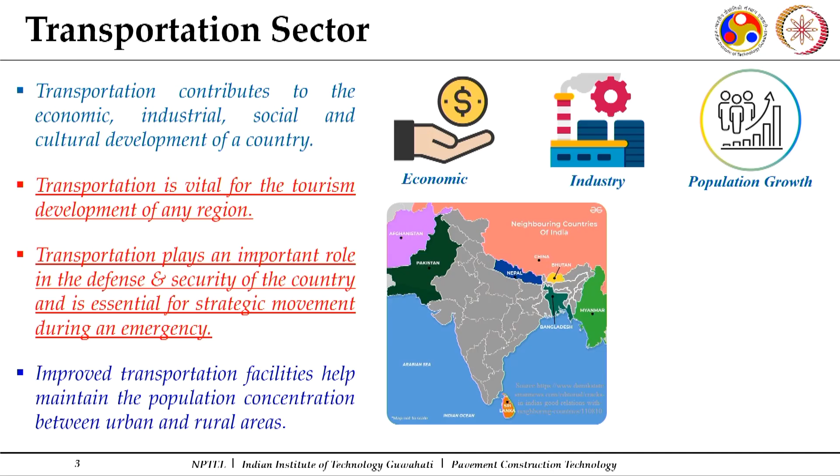You might have seen various cities in India and abroad which have picked up as industrial centers, as well as centers for social and cultural development, because of good transportation facilities available in those regions or cities. In addition, it plays a very important role in the tourism of a country, as in our country we have certain regions like this.

Leh is a place located in Jammu and Kashmir. It is a tourist center and a place of attraction, as it offers good transportation facilities, with good connectivity by road and by air. So transportation plays an important role in the development of tourism of any country.

It plays an important role in the defense and security of a country, and is essential for strategic movement during an emergency. India shares international borders with many other countries, so from a strategic point of view, the development of transportation facilities along the international borders also forms an important part of the country's development.

Improved transportation facilities help us maintain the population concentration between urban and rural areas. This is again a matter of concern. You can see for any state or city what the population density is - for example, in Mumbai compared to the whole population density of Maharashtra state, or the population density of Patna compared to the population density of the entire Bihar state.

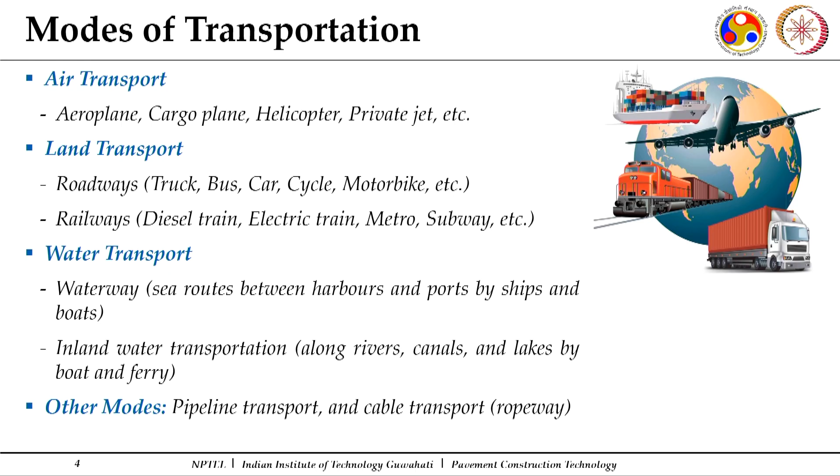Certain countries like Germany, Belgium and Netherlands have very good inland water transportation. In India also, we are developing inland water transportation facilities along certain sections. This is comparatively a slower mode of transportation, but the cost is quite less compared to air transportation. Some other modes may be pipeline transport or cable transport, like ropeways. So these are the major modes of transportation.

Now let us look at the development of roads. Even if we go back to the Roman period, the earliest large scale highway road construction is attributed to the Romans, who constructed an extensive system of roads radiating in many directions from Rome around 312 BC.

At the peak of the Roman Empire, there were more than 4 lakh kilometers of roads, out of which 80,000 were stone paved. This shows that even in that old period, there was significant importance given to road transport.

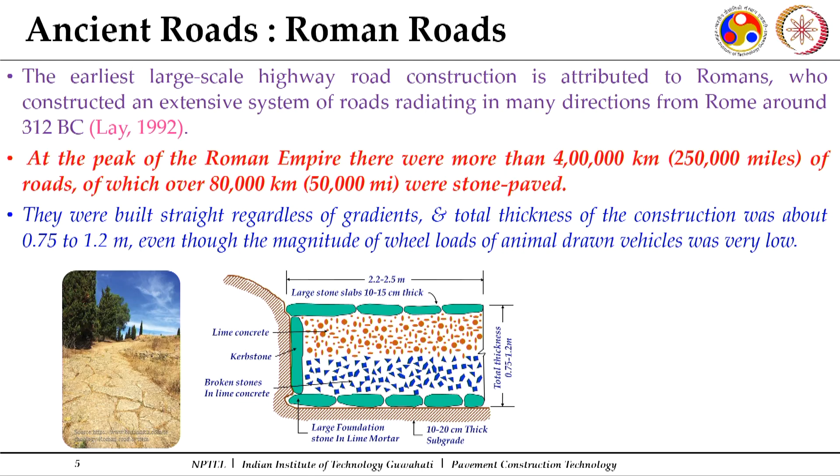Even in the Indian subcontinent, we have a very old history with the development of roads. Indian civilization, one of the oldest in the world, had evidence of road construction dating back to around 2800 BC. Excavations from the Mohenjo-daro civilization are shown on the right hand side. Excavation of Mohenjo-daro and Harappa revealed the existence of roads during the period of 2500 to 3500 BC, showing how roads were present at that moment in time.

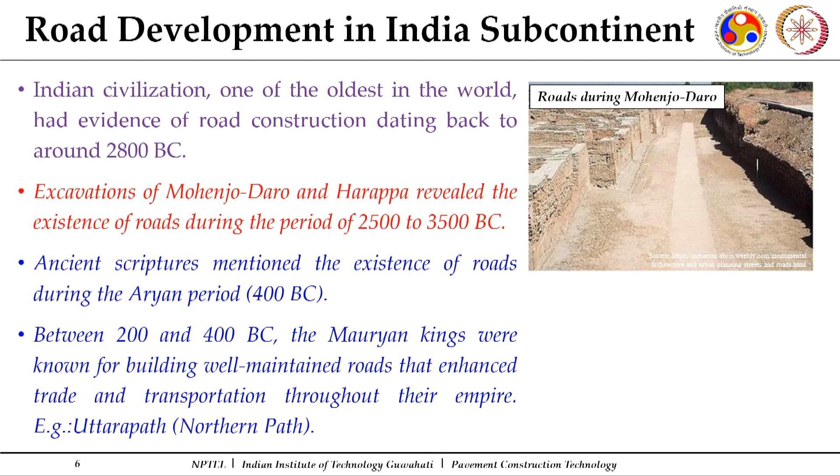Ancient scriptures mention the existence of roads during the Aryan period also, around 400 BC. Between 200 and 400 BC, the Mauryan kings were known for building well-maintained roads that enhanced trade and transportation through their empire. So even those old civilizations knew the importance of good road networks for growing their trade.

Over the centuries, the road has acted as one of the major trade routes in the region, facilitating both travel and postal communication. These road sectors, still existing, played a very important role in earlier periods, and currently also we realize their importance. In coming slides I'll explain and highlight the importance of road transportation.

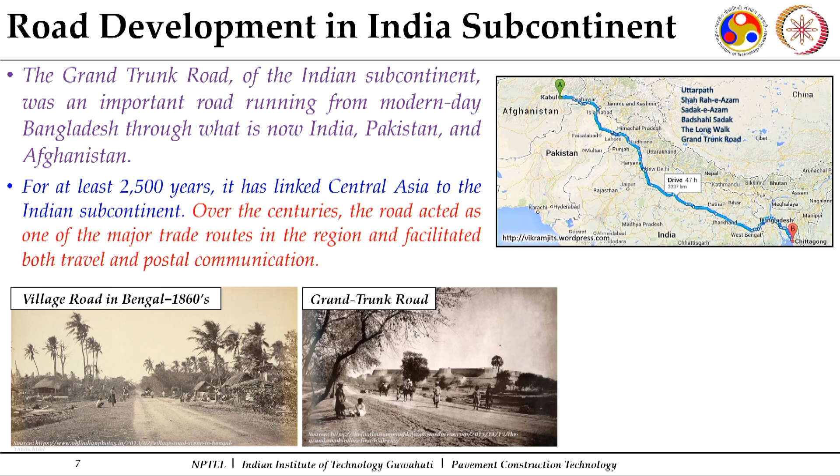Now, what were the traditional methods used for road construction? Just to give an idea of how roads were constructed, what combinations were considered, and how surfaces were built for the movement of people and animal drawn vehicles. One of the popular traditional methods is the Trésaguet method. Pierre Marie Jérôme Trésaguet was the Inspector General of Roads in France.

He suggested the thickness of construction to be around 30 centimeters with proper side drainage. Again, this picture has been drawn to explain some features, not exactly to scale. You can see large foundation stones placed at the top of the subgrade soil, then broken stone pieces over that, and finally smaller pieces on top, with a camber of around 1 in 45.

So this camber is around 2.2 to 2.5 percent. Normally nowadays also we construct roads with a camber of around 2%. The top layer, the wearing course, was constructed using small sized broken stones or hard angular gravel. They did not incorporate any binding material.

Nowadays the surfaces we construct, called paved roads, make use of binding materials. The common binding materials are cement, bitumen, and fly ash. But at that time, they were not using any binding material such as bitumen or cement. Instead, they relied solely on mechanical interlock between the aggregate pieces and compaction through traffic to achieve stability. Provision of camber was there.

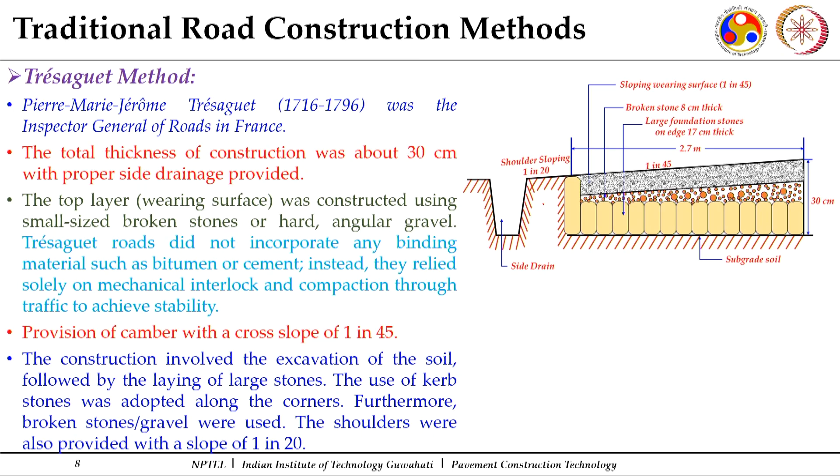This was felt necessary so as to remove surface water. The construction involved excavation of the soil, followed by laying of large stone pieces. The use of curb stones was also found reported in some studies. Furthermore, broken stones and gravels were used. The shoulders were constructed at a steeper slope compared to the main surface.

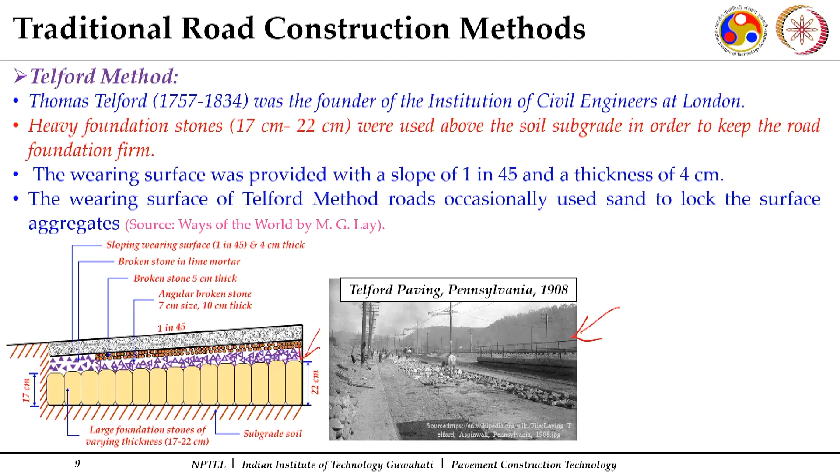This shows how, from very old periods, things were getting developed, how the technology was improving, and how the understanding of road construction methodology was developing. So these are some of the traditional road construction methods.

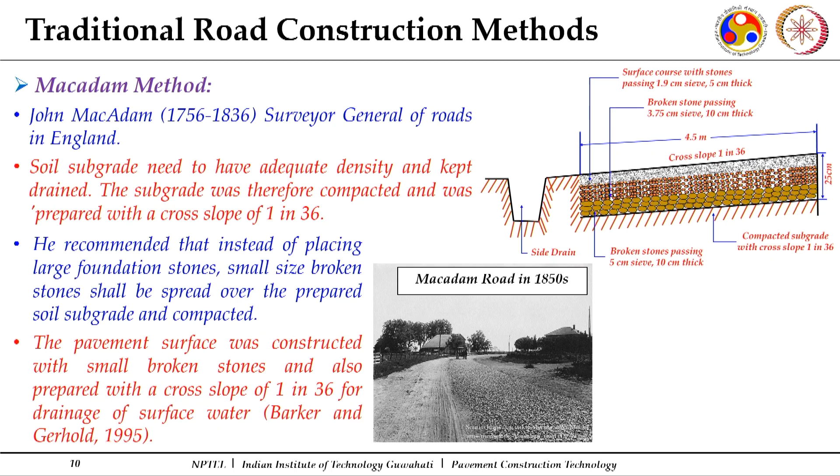As we can see, from very old civilization to what we have currently, everybody has felt the importance of road transportation. Why is there so much demand for road transportation? We have seen that it contributes to every sector - social development, industrial development, tourist development. It is also important from a strategic point of view. From a user perspective, everybody, for any mode of transport, requires comfortable and safe movement from one place to another. Whatever mode of transportation we use, our main requirement is that the movement should be comfortable and safe. These are the two main requirements from any user's perspective.

Among surface transport, especially roads and railways, I will be focusing more on road transport in this course. Surface transportation is the most widely used mode of transportation, not only in India but throughout the globe. A country's development is often measured in terms of its total paved road mileage. Fortunately, India has the second largest road network. So a country's progress or development is measured in terms of how much length of road it has. This surface or road transportation is important because of easy accessibility, flexibility of operations, door to door service, and reliability, which have earned road transport an increasingly higher share of both passenger and freight traffic. This is the beauty and advantage of road transportation.

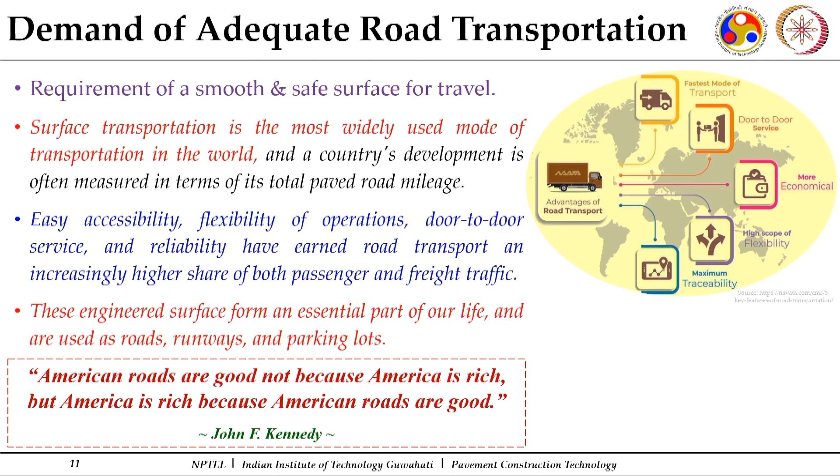There is a very common quote by US President John F. Kennedy, who said, American roads are good not because America is rich, but America is rich because American roads are good.

Now let us come to the current state of Indian road infrastructure. Most of this information has been derived from the Ministry of Road Transport and Highways and the Indian Brand Equity Foundation. If we look at the Indian road infrastructure, we have a total length of around 66.71 lakh kilometers, which is a figure from 2024.

Under this particular classification, you can see NH represents national highways, SH represents state highways, and all other categories are kept under the category of other roads. India has about 66.71 lakh kilometers of road network, which is the second largest in the world. This comprises national highways, expressways, state highways, major district roads, other district roads, village roads, and urban roads. I will discuss these different categories of roads when I discuss the classification of roads.

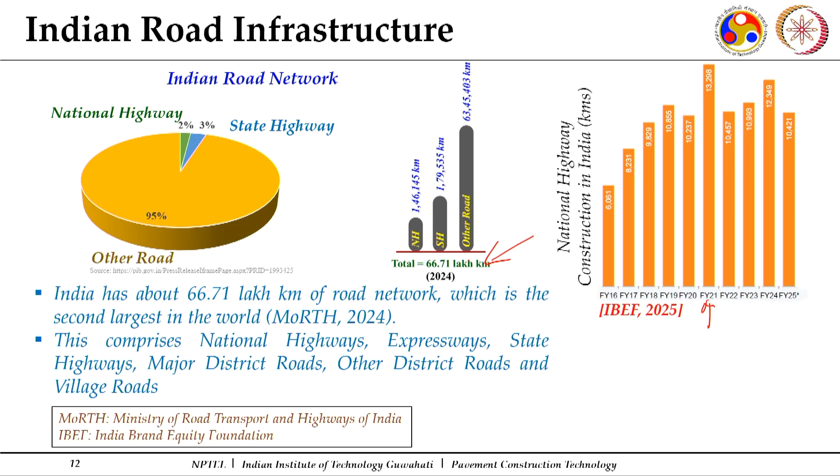This bar chart on the right hand side shows how much length of national highways were constructed in different financial years. The interesting fact to note here is in the financial year 2021, which is the period of the COVID pandemic, the length of national highway constructed in the country was still around 13,000 kilometers. So even when difficult times are there, every government or every country focuses on development to boost up the economy.

One major focus always goes on the development of infrastructure, and road infrastructure plays a vital role there. This gives an idea how road infrastructure is important for the development of any country.

This will further highlight the significance of road infrastructure currently under the Indian scenario. In India, over 64.5% of all goods in the country are transported through roads, while 90% of the total passenger traffic uses the road network to commute. This shows the importance of road infrastructure, and the focus of a country on developing road infrastructure.

National Highways Authority of India, the body which looks into the construction of national highways, spent a record-breaking 2,07,000 crores on the construction of national highways in the financial year 2023-24. In the financial year 2020-21, the construction of highways paced to 36.5 km per day, which is the highest ever construction speed of national highways in the country.

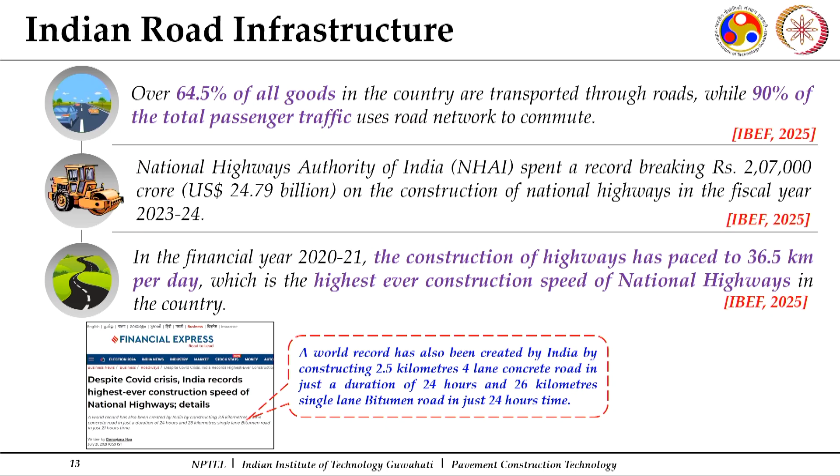Along with that, an example is given here of how advanced we have moved. A world record has been created by India by constructing a 2.5 kilometer 4-lane concrete road in just 24 hours, and a 26 kilometer single lane bituminous road also in just 24 hours. This shows how much advancement has been made in construction technology and how much focus is coming on road infrastructure.

This again shows an idea about the government's focus through the budget allocation made for the Ministry of Road Transport and Highways. This gives us an idea how the focus of the government is there towards road infrastructure development.

Road transportation emerges as a dominant segment in India's transportation sector, with a share of around 4 to 5% in the GDP of India. In 2025-26 also, the union budget has allocated around 2,87,333 crores to the Ministry of Road Transport and Highways. So you can see from 2020, 21, 22, 23, 24, the allocation of funds is already very high, but year by year it is increasing.

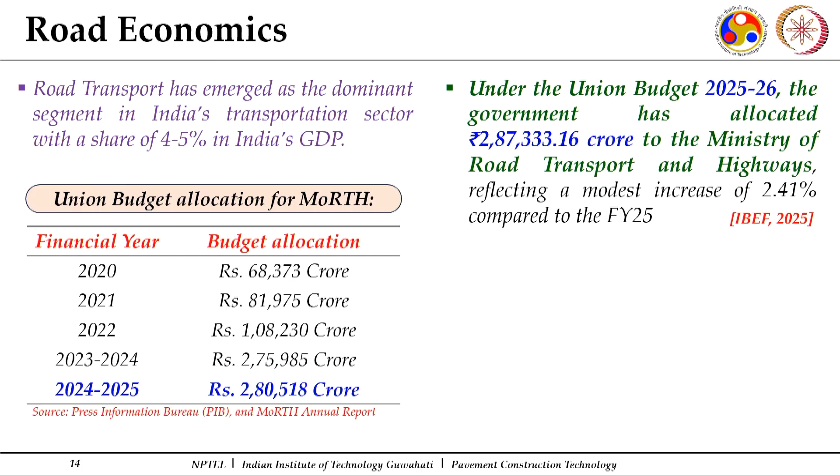Now the second thing, as I said, when we discussed the total road length, we mentioned different categories of roads are there. So what are those different categories, and how is the classification done? Two broad classifications are done on the basis of urban roads and non-urban roads.

Under non-urban roads, many times a term used is rural roads in rural regions, but those are non-urban roads, and the categories considered are expressways, national highways, state highways, district roads and village roads. When it comes to urban sections, the classifications are urban expressways - majorly expressways pass through urban sections also, rural sections also - then we have arterial roads, sub-arterial roads, collector streets and local streets.

The other part of classification, which we will discuss in coming lectures, will be on the basis of their composition. I am just mentioning the two main classification systems: flexible pavements and rigid pavements. Along with it, I am referring to the Indian Roads Congress specifications, like IRC 73, the geometric design standards for non-urban roads, and IRC 86 2018 revision, the geometric design standard for urban roads and streets. Further information discussed here refers to these particular codes.

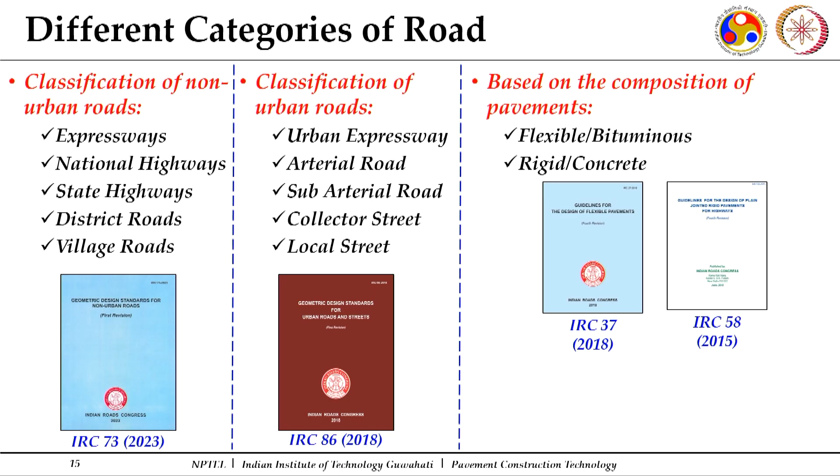Now the first category under the non-urban roads comes up as the expressway.

It specifically deals with expressways. What are expressways? They are a class of highway with superior facilities. We can call them high speed corridors, but national highways are also considered high speed corridors. Expressways form a special class of highways with superior facilities, and design standards are meant for a through route catering to high volume of traffic. The geometric design standards are as per IRC 73 2023 and IRC SP 99.

They provide more lanes. We have the Delhi Gurgaon expressway and other expressways with 6 lanes, 8 lanes, even 12 lanes. They provide more lanes, a better surface, a divided carriageway, controlled access — this is a very important part — grade separations at crossroads, and even fencing.

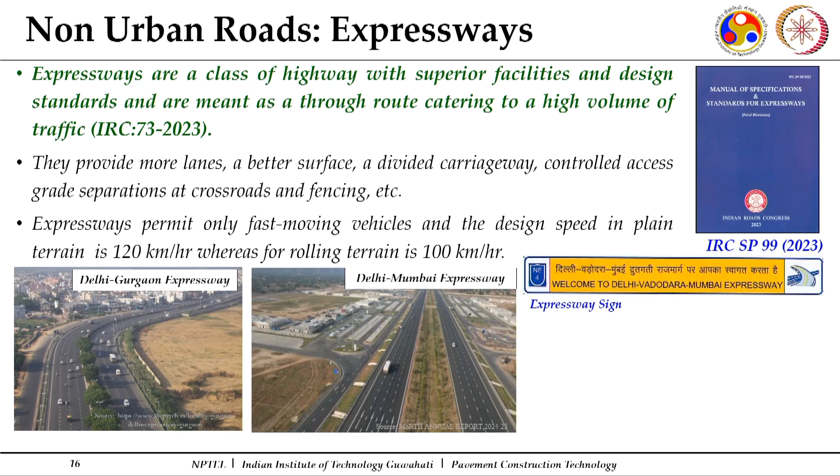Expressways are especially meant for fast moving vehicles, and the design speed in plain terrain is 120 km per hour, whereas for rolling terrain it is 100 km per hour. When it comes to terrain, classification is on the basis of cross slope. When the cross slope is from 0 to 10%, we call it plain terrain. When the cross slope varies from 10 to 25%, we call it rolling terrain.

The second most popular category of roads in India is national highways. We keep traveling from one place to another — for example, we travel on NH27, a highway which passes through the state of Assam. National highways form an important category of roads running through the length and breadth of the country, connecting major ports, foreign highways, state capitals, large industrial and tourist centers, etc., including roads required for strategic movements for the defense of the country. This is an important category of roads under non-urban roads.

National highways are constructed and managed by the National Highway Authority of India, the National Highways and Infrastructure Development Corporation Limited (NHIDCL), and in some cases by the Public Works Department where they pass through certain states. Some parts may be managed by the Public Works Department of a particular state.

The national highway network has grown by 60%, rising from a length of around 91,000 km in 2014 to around 1,50,000 km by the end of 2024. So major development has taken place in the development of national highways because these are high speed corridors.

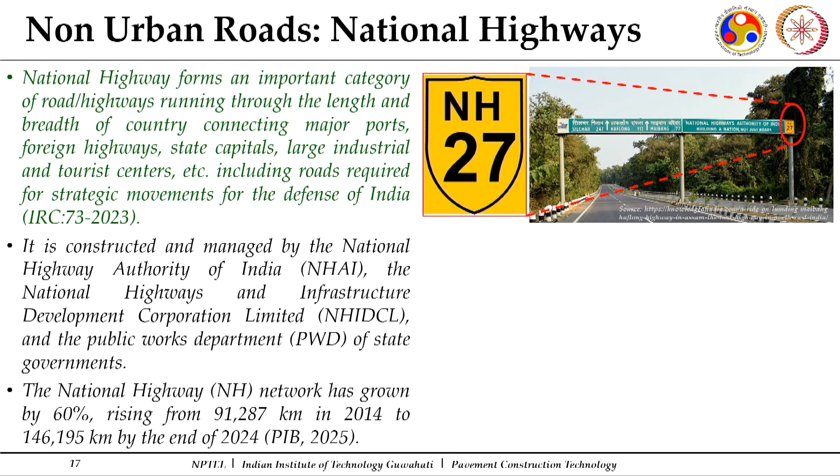Some of you might be aware of a very famous road development scheme, the NHDP program — National Highways Development Program — a project taken up or ongoing to upgrade, rehabilitate and widen major highways in India to a higher standard. The project was launched in 1998, and was managed by the National Highway Authority of India under the aegis of the Ministry of Road Transport and Highways.

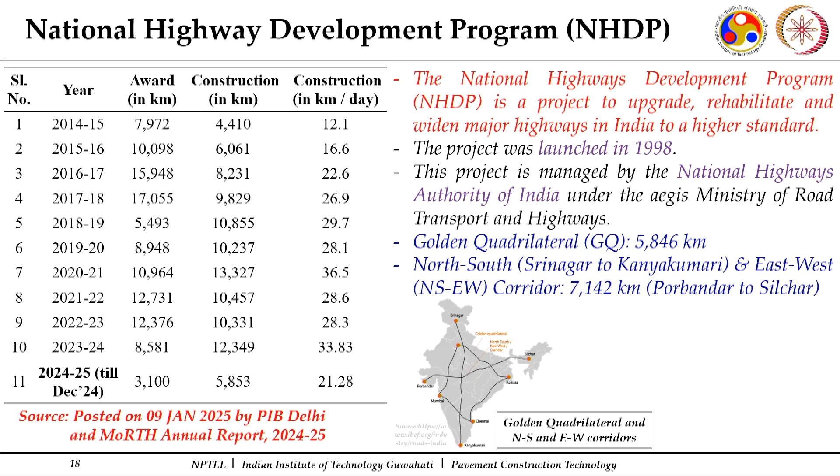One major part of this scheme was the development of the Golden Quadrilateral, which connects Delhi to Mumbai, to Chennai and Kolkata. Then we have the north-south corridor which connects Srinagar to Kanyakumari, and the east-west corridor which connects Porbandar to Silchar. There are many more popular schemes ongoing, showing how the government is taking up different schemes and projects for the development of these high speed corridors throughout the country.

The other important category of roads is state highways. As per IRC Codal Provision IRC 73, a state highway is defined as an arterial route of a state linking district headquarters and important cities within the state and connecting them to the national highways or highways of neighboring states.

National highways and state highways usually have the same design standards in terms of geometry and design speed. State highways are mainly constructed by the Public Works Department of states, or constructed under different schemes.

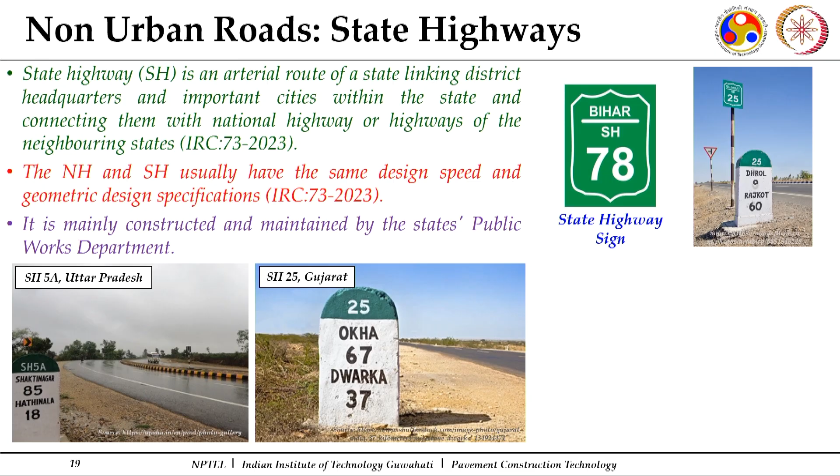You can see State Highway 5A in the state of Uttar Pradesh, State Highway 25 in the state of Gujarat, and State Highway 78 in the state of Bihar — these are pictures of different state highways. The other category in the classification of roads is district roads, which consist of two categories: major district roads and other district roads.

Major district roads are important roads within a district, serving areas of production and markets and connecting these with each other and with the main highways. The main highway may be a state highway most probably, or a national highway. Major district roads have lower speed and geometric design specifications as compared to state highways and national highways.

Other district roads are roads serving rural areas of production, providing them with an outlet to market centers, talukas, tehsil headquarters, block development headquarters, or other main roads. So these are the categories which come under major district roads and other district roads.

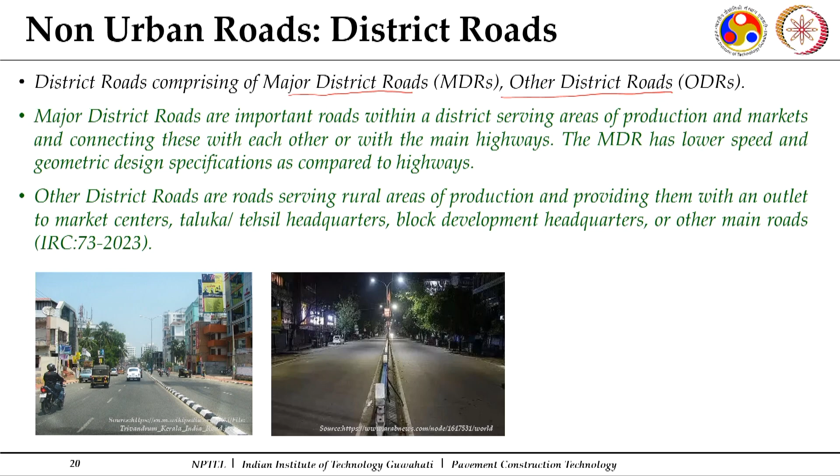Then comes another major classification, which is village roads. This connects villages or group of villages with each other and to the nearest road of a higher category. This forms a major important segment of Indian road infrastructure. They serve as feeder roads as well as roads for inter-village movements, and some of you might be aware of the very popular scheme, the Pradhan Mantri Gram Sadak Yojana, abbreviated as PMGSY, which was launched in the year

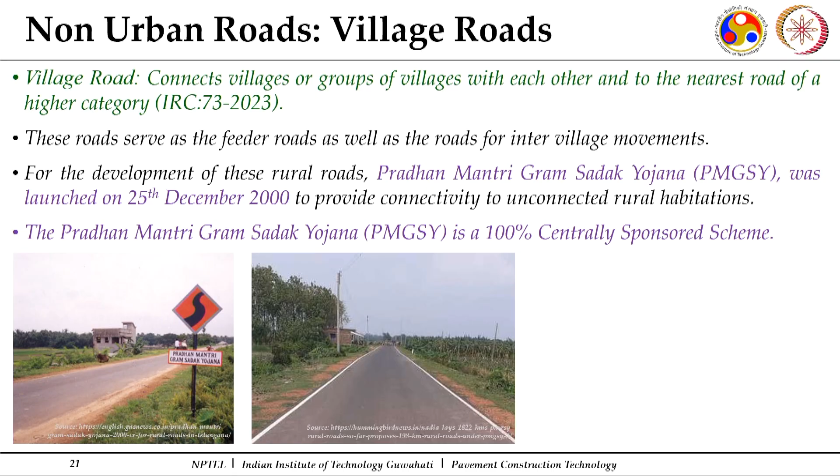25th December 2000, to provide connectivity to unconnected rural habitations. This is a 100% centrally funded scheme, and it has played a very important and significant role in the development of villages and rural areas throughout the country. It is a marvelous example of how to bring development to rural areas through road connectivity.

Whenever you travel on these roads, you might see different kinds of kilometer stones. From these kilometer stones, you get an idea whether it is a national highway, a state highway, a major district road, or a village road. All these kilometer stones need to be constructed as per IRC codal guidelines only.

IRC 8 gives the details about the type designs for highway kilometer stones. An example is there, showing where the place name should be placed, what the font size should be for the place name, how the kilometerage has to be placed, what the font size has to be for it, and how the route number is to be placed. All this information is as per codal specifications, which gives you an idea about the type of road it is, and the distance from different places.

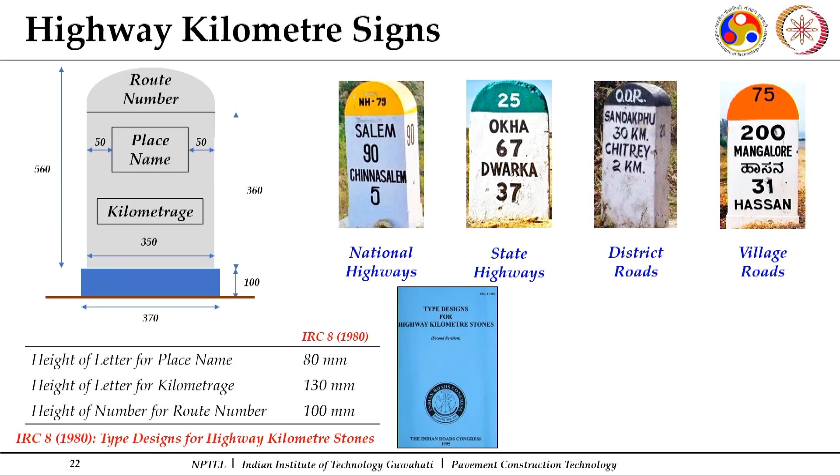Now the second classification of roads comes under urban roads, where you have four different major roads: arterial roads, sub-arterial roads, collector streets, and local streets.

So a road or street primary for through traffic, usually a continuous route, is considered an arterial road. The IRC codal specification which gives information about it is IRC 86 2018, which gives geometric design standards for urban roads and streets. And for space related information, we have IRC 69 1977, space standards for roads in urban areas.

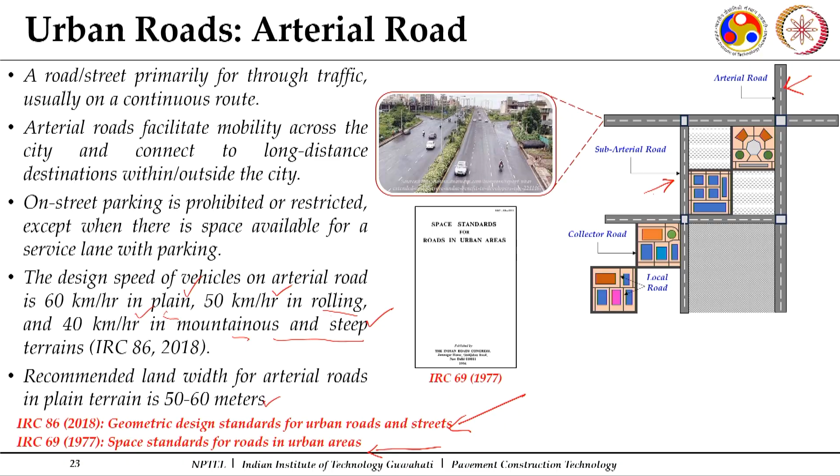I mentioned that plain terrain is where the cross slope is from 0 to 10%, rolling terrain is in the range of 10 to 25%. When we say mountainous terrain, it is 25 to 60%, and when it is more than 60%, it comes under steep terrain. The recommended right of way width for arterial roads in plain terrain is around 50 to 60 meters. So this is a general requirement for arterial roads, which comes under the urban roads category.

The other category, as mentioned earlier, is subarterial roads, a general term denoting a street primarily for through traffic, usually on a continuous route, but offering a somewhat lower level of traffic mobility than arterial roads. Their spacing may vary from 0.5 km in the central business district to 3 to 5 km in the suburban fringes.

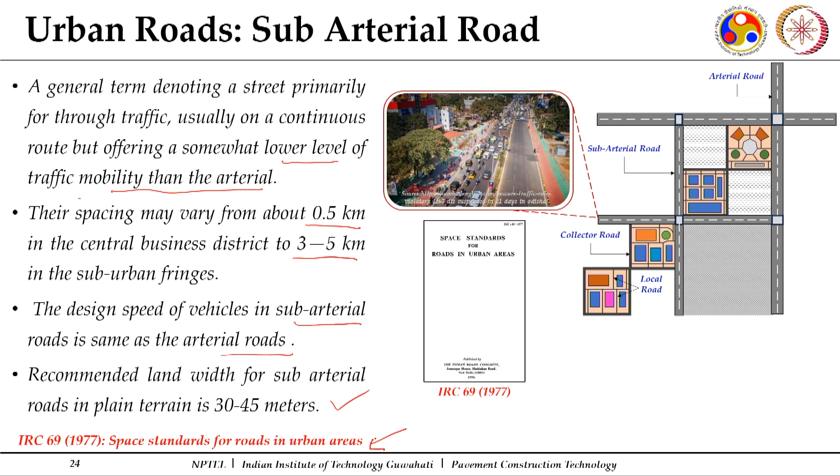The design speed of vehicles on subarterial roads is the same as that of arterial roads. Recommended land width for subarterial roads in plain terrain is 30 to 45 meters. The space standards for these subarterial or arterial roads have to be referred to through IRC 69, 1977.

The other category under urban sections is the collector street. As the term suggests, it is a street used for collecting and distributing traffic from and to local streets. So these local streets feed into it, and it distributes traffic to and from the subarterial roads.

A collector street is for collecting and distributing traffic from and to local streets, and also for providing access to arterial streets. Its function is to collect traffic from local streets and feed it to arterial and subarterial streets, or vice versa.

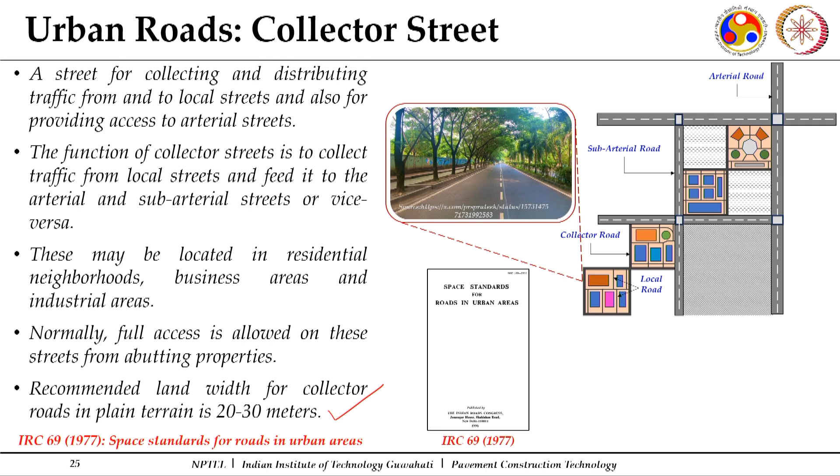These may be located in residential neighborhoods, business areas, and industrial areas. Normally, full access is allowed on these streets from abutting properties, except in some cases during peak hour flows. Recommended land width for collector roads in plain terrain is 20 to 30 meters. More details are to be referred through IRC 69, which gives complete information.

Then you have the local street, which is a street primarily for access to one's residence. From your residence, you move out and access a local street, which provides access to residences, businesses, or any other abutting property.

These are intended primarily to provide access to abutting property and normally do not carry large volumes of traffic, just a small volume for residences and small developments. Majority of trips in urban areas either originate or terminate at these streets, since you finally go out for work and come back.

They may be residential, commercial, or industrial depending upon the predominant use of the adjoining land, whether it lies in an industrial, residential, or commercial zone. They allow unrestricted parking, and pedestrian movements are also unrestricted.

Recommended land width for local streets in plain terrain is 10 to 20 meters. This gives us a broad classification of the different types of urban sections which we have.

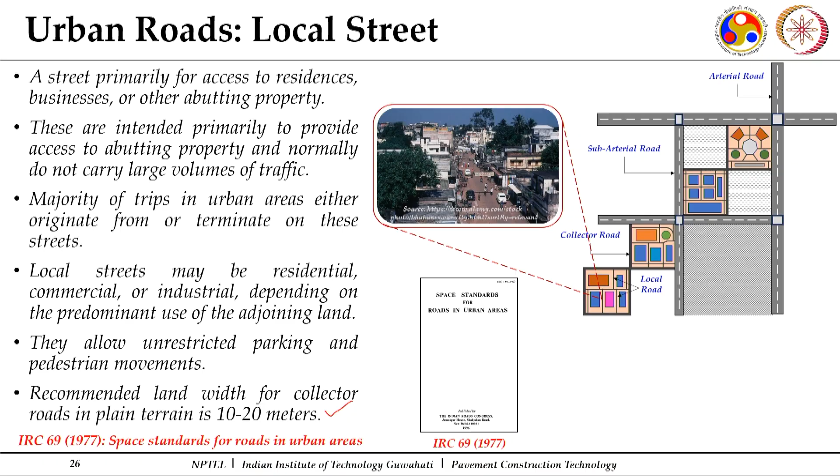In today's discussion we covered the importance of the transportation sector, different modes of transportation, and the development of roads, including traditional methods used in road construction. We also discussed the Indian road infrastructure, its current state, the government's focus, and ongoing schemes.

Then we discussed the classification of different types of roads under two main categories: urban roads and non-urban roads. Non-urban roads include expressways, national highways, state highways, major district roads, other district roads, and village roads. Urban sections include arterial streets, sub-arterial streets, collector streets, and local streets.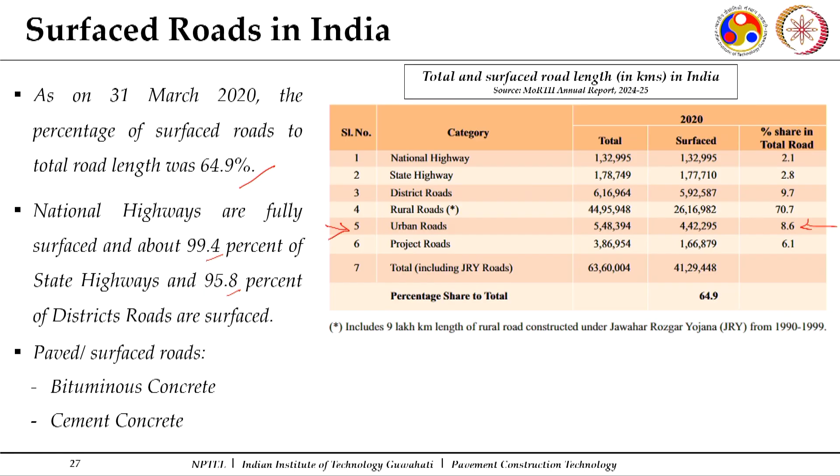When we talk of surfaces, the term conventionally used is paved surfaces, meaning either a bituminous paved surface or a cement concrete paved surface. We will discuss these aspects in the coming lectures.